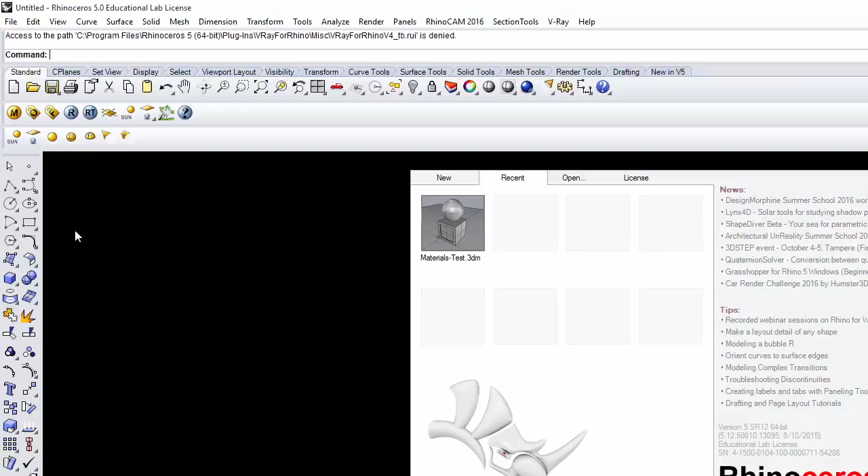This is a requirement for your assignment 203. So not only do you need to have 3 renderings with beautiful skies behind your buildings, you also need to show me a laser cut file of what you would use to cut out this building if you were going to glue it together, because I think it's important enough to include it. So today is very much about learning the technique. You should have enough time today to also work on your buildings for assignment 203, and or work on your unrollable surfaces for assignment 203.

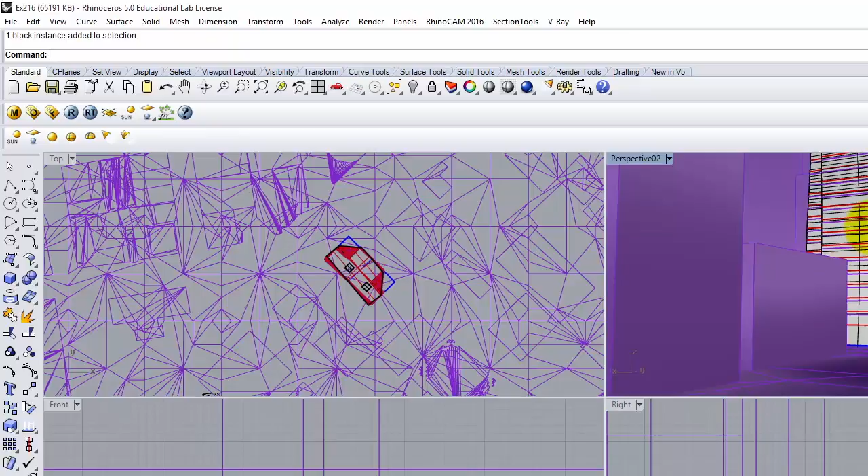So let's go ahead and open up my file from last class. What were we in? What are we in? 217 today, so it would have been in 216. You know what? Let me go back another one here.

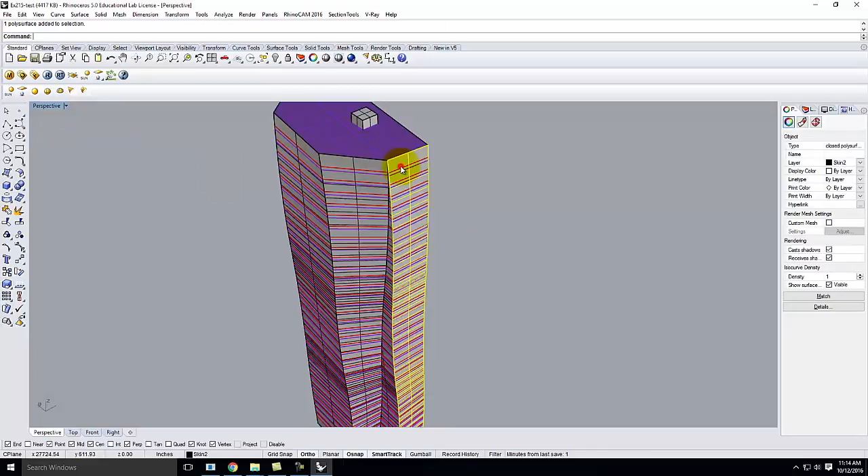Okay, so I have just the building here. Let me go ahead and go in shaded mode. There it is. Okay, and what we're going to be working on today is just the outer skin of the building. So I'm going to go ahead and in the layers, I'm going to turn off. Let's get rid of the floors. Let's get rid of the ceilings. And we'll leave just the skin there.

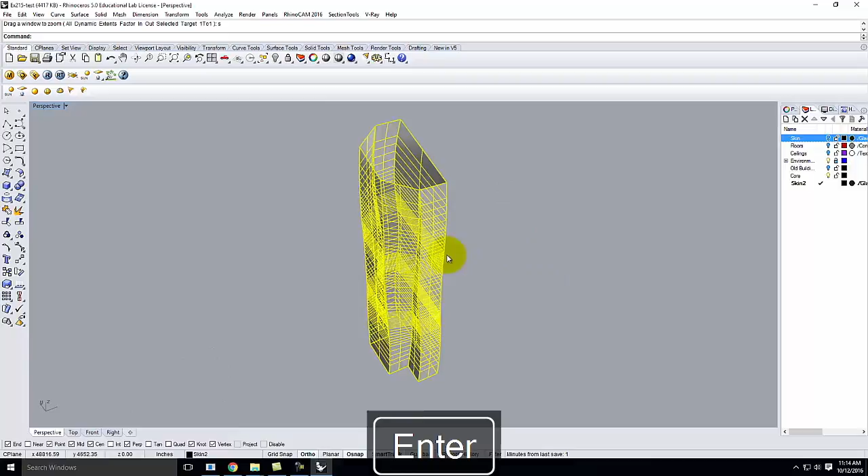I'm going to go ahead and just copy this skin for a second over, so that I'm working with this elsewhere. So I'm going to go ahead and copy, move it over, take this and zoom selected on it. So we're looking at just the skin of the building. And so the idea here is that I want to be able to take this and make these surfaces flat so that I can cut them out, glue them back together, and they'll end up making this building.

And so Rhino has a great command for it that's called unroll surface. I could take any one individual surface and go up—I forget what this is under because I always just type unroll surface. So bear with me. There it is. It's under Surface, Unroll Developable Surface.

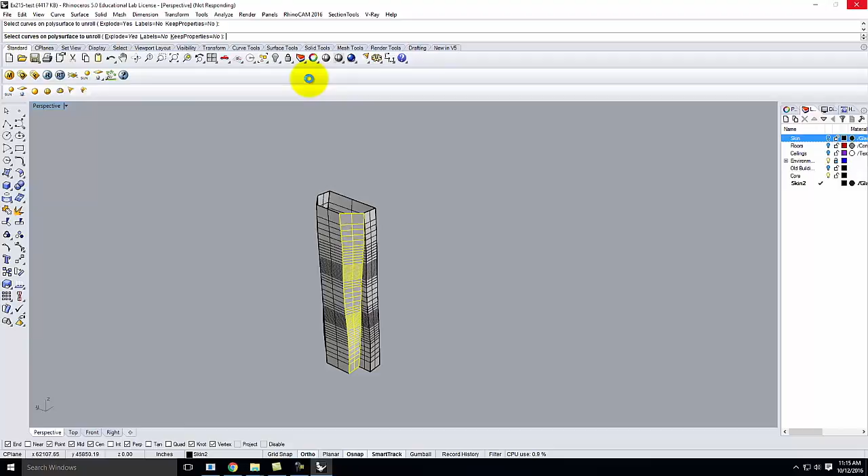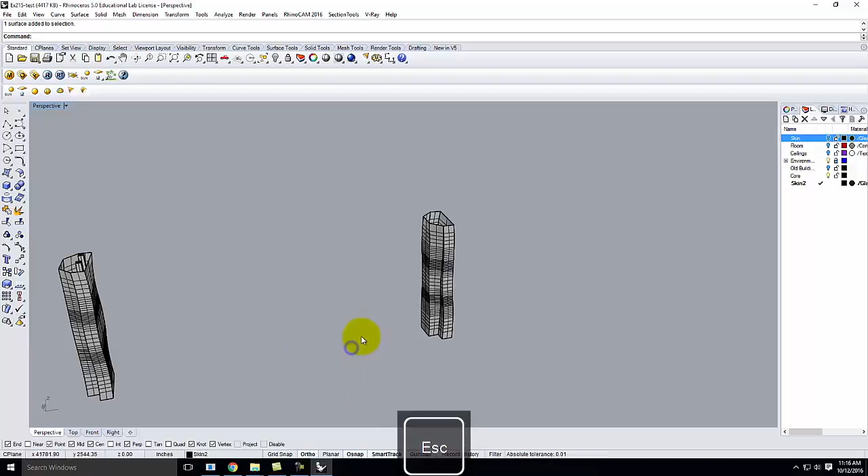And when I do that, I get some options. It says select curves on polysurface to unroll, explode yes, labels no, keep properties no. I'm going to talk about what these are in just a second. But essentially what this does when I say enter is it will create a flat surface for me that's over at 0,0 that represents this piece that I had selected before, okay?

But it can be very, very challenging to unroll these surfaces and figure out how they all glue back together if we don't do them all at once. And so instead of just selecting an individual surface, I'm going to take this a step further.

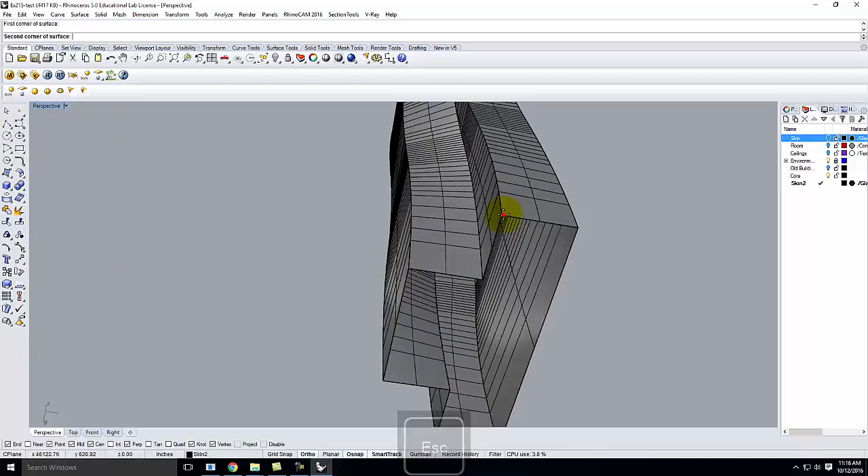Let me go ahead and create a top and a bottom for this building because somehow I've managed to lose the top and the bottom. Okay, so I have a top there. Create a bottom here real quick.

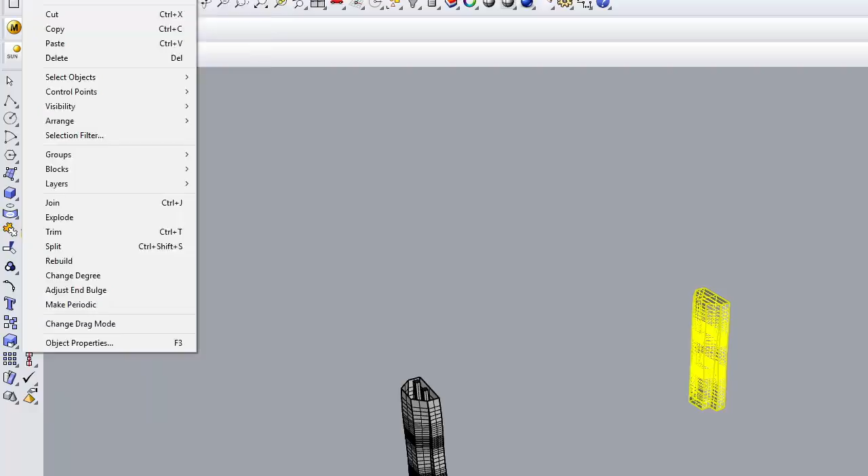Okay, now that I have a top and a bottom, I'll go ahead and take the whole object, and then I'm going to join that object together. So I'll go up to—it's under Edit, Join—and that now becomes one. It's supposed to become one polysurface. Why didn't I? Oh, how nice, right? You gotta love it when things don't do what they're supposed to do.

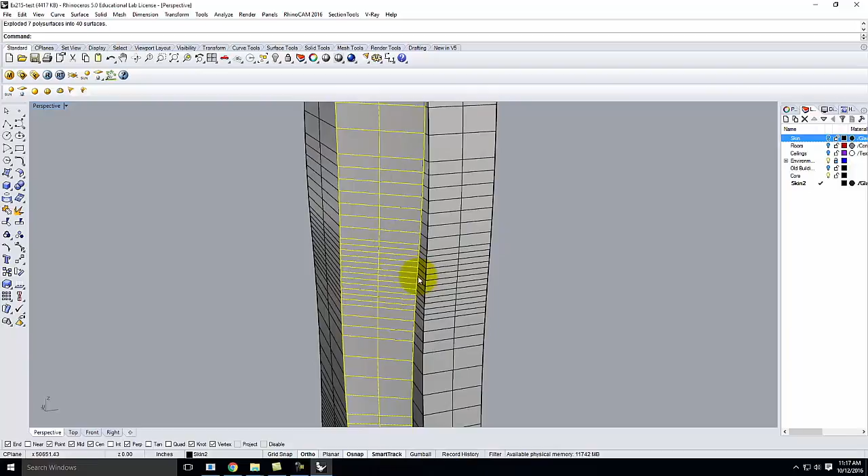Somehow I really managed to mess this up. Sorry about that. I have a bunch of surfaces on top of themselves. Let's see if we can fix this.

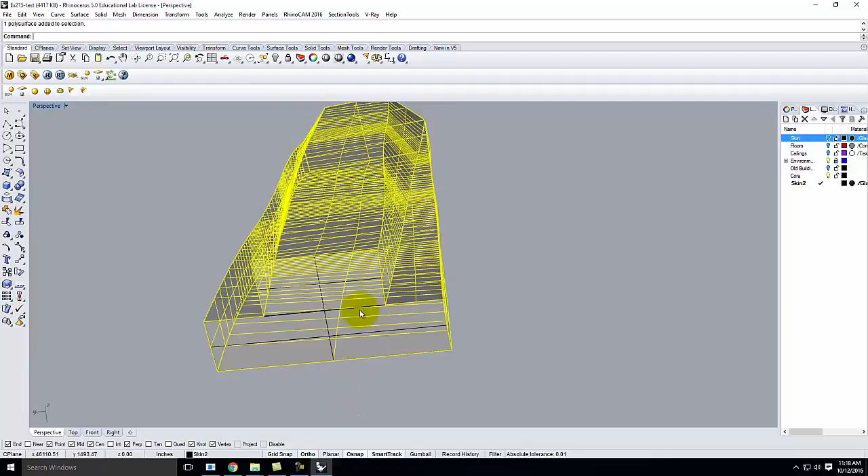All right, see if we can join that. And let's move this one. And it's still being terrible.

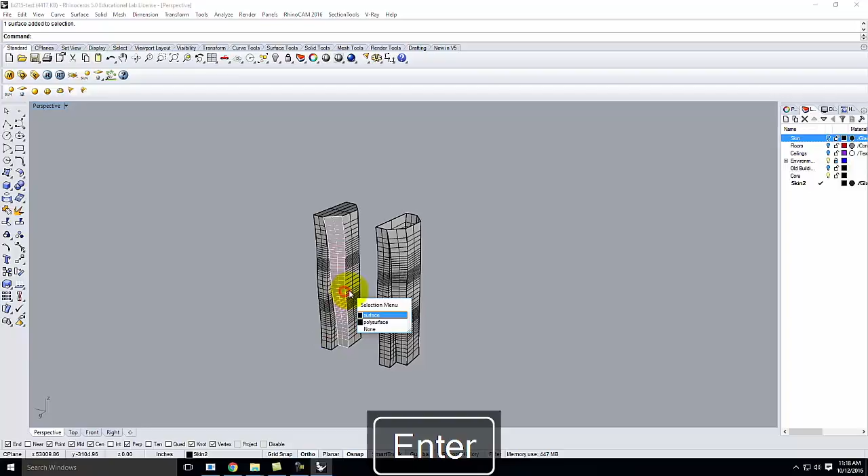Huh, okay. You know what? Give me a second. I'm just going to make a new building because this is really not working for me right now. So let me go ahead and create a new building really quickly so you can start to see this. So at 100 feet, 200 feet.

Actually, you know what? Since I had that building, let me just create a few curves from it. I'm going to duplicate edges 1, 2, 3, 4, because this may happen to you. You may end up like me and have something that gets messed up.

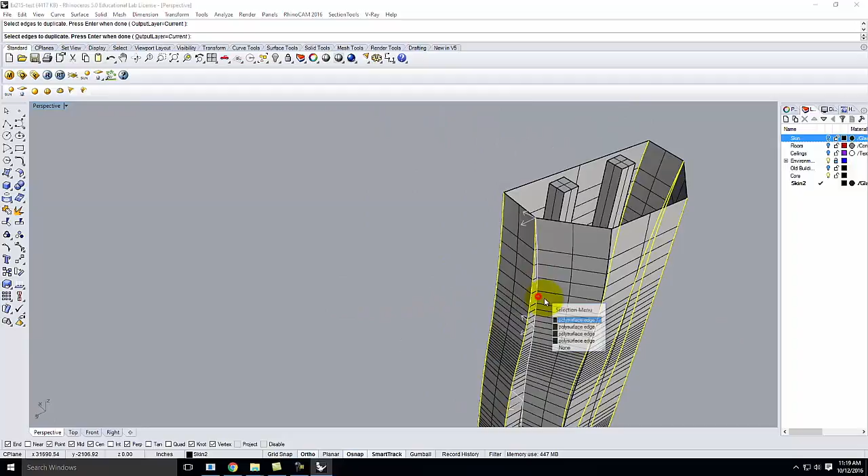6, 7. So all I did was I duplicated my edges around my object. Let's move these over so that they're by themselves. And then I'm going to select the opposite pieces like this, and we'll loft and build each of the pieces as they go together. So let's take this and this, loft.

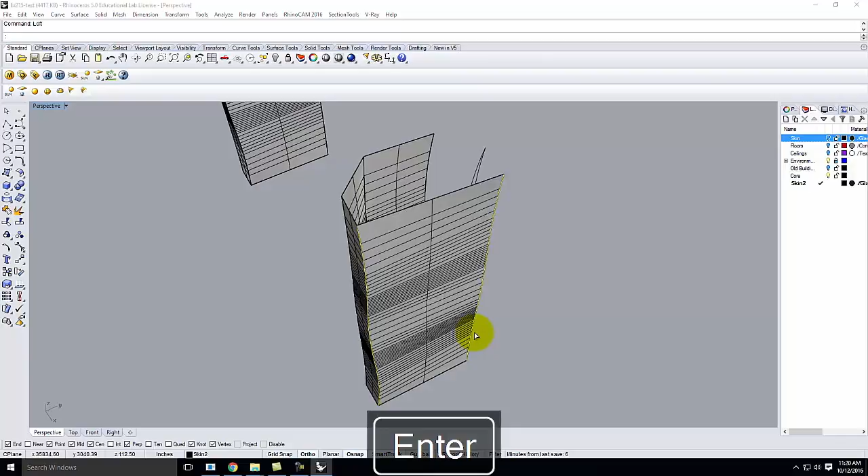It's always a safe bet, especially even if you have double curvature and it won't let you unroll the surface. If you duplicate the edges, the major corners, and then loft between them, you know that that's a flat, developable surface between them. Therefore, you're in all likelihood going to be able to do the export or to do the unroll.

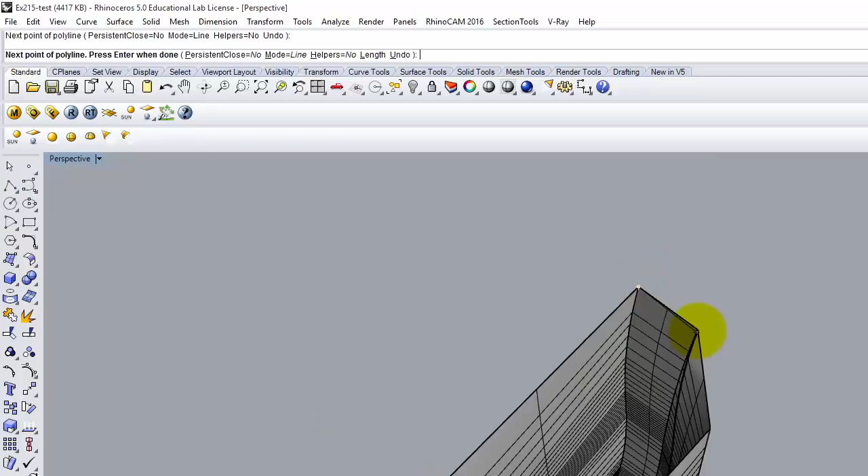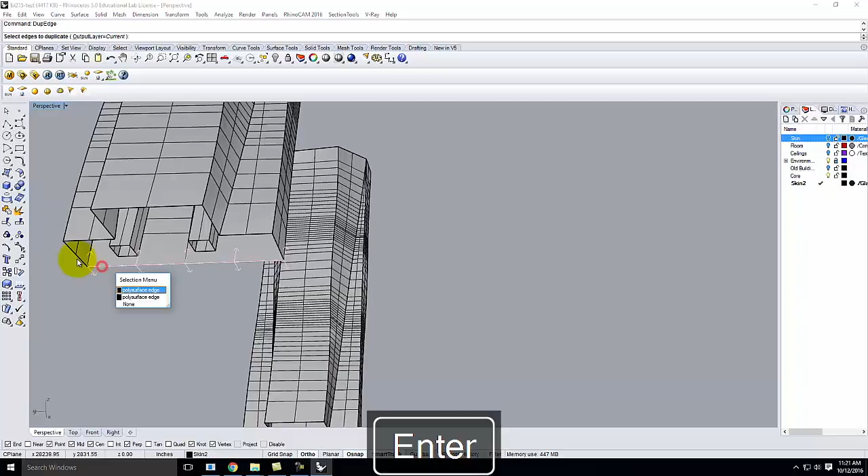Go ahead and take this, and let's patch that. There we go. And let me also patch the bottom here. It's essentially, I could do a surface from 3 or 4 corner points and join them together. I can do the edges like this and then patch. It's just really what feels right for you.

Did I do the wrong one? Yeah, I did. It's this one.

Okay, so now I have that shape the way it should have been, and I should be able to take the shape and I should be able to join them together into one polysurface. That's what we were after.

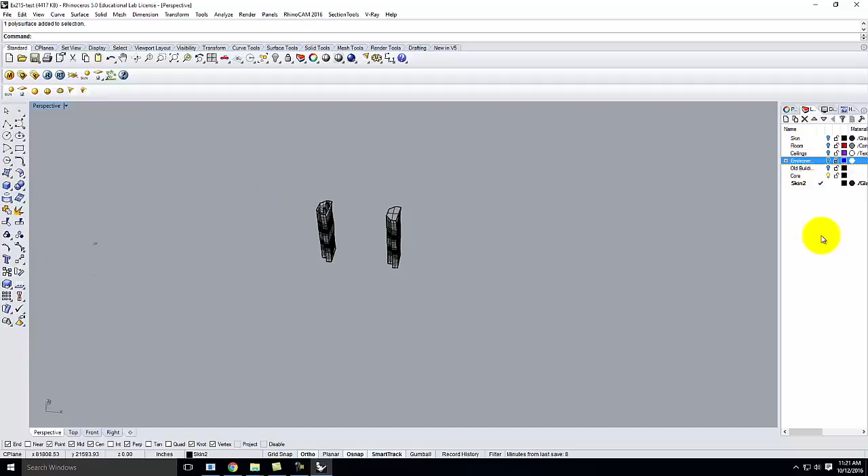Okay, now that it's joined together in one polysurface, I'm going to go ahead and make my life a little bit easier. I'll turn off my environment so the infinite plane goes away, and I'm going to create a new layer here, and I'm going to call this Unroll, and I'm going to put it at the bottom of my layer stack right there, and I'm going to make it active.

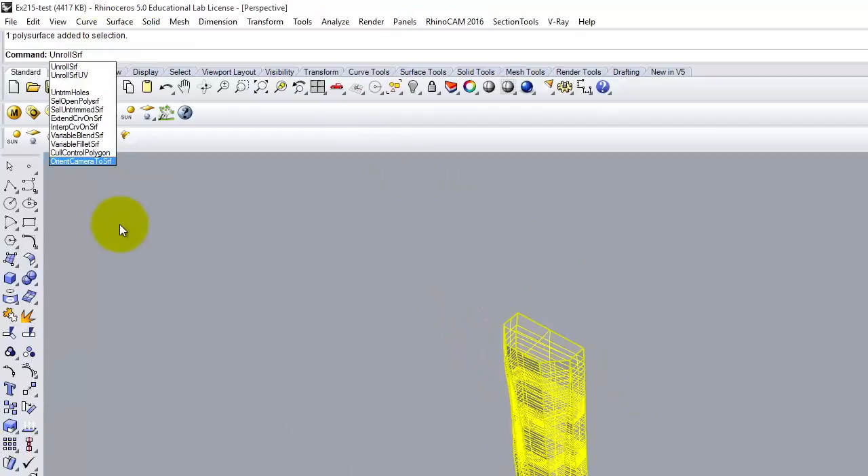And now with that layer active, I'll select my object, and I'm going to type unroll surface, unroll SRF, or I can go up to the surface menu and select unroll developable surface. And when I do that, it of course is going to tell me that I can't do it because it's not a developable surface, even though I just did this.

It probably means that one of my patches at the end is incorrect. So let's go back and fix those. They're curving. We'll go ahead and just do 2 rectangles.

Going to join that together, trim, and get rid of that. And trim that little piece there. That might have been my problem piece right there.

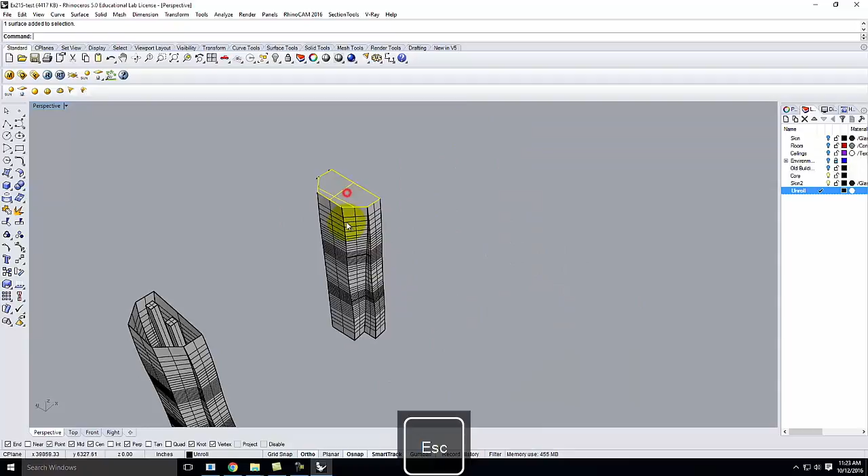All right, let's try that again. So this, plus this, plus this, and this, join, one polysurface, unroll surface. There we go.

So it's going to ask me to select the curves on the polysurface to unroll. Right now, I'm not going to do anything about that. Explode, I'm going to set to yes. Labels, I'm going to set to yes. So I click on labels, and keep properties, no.

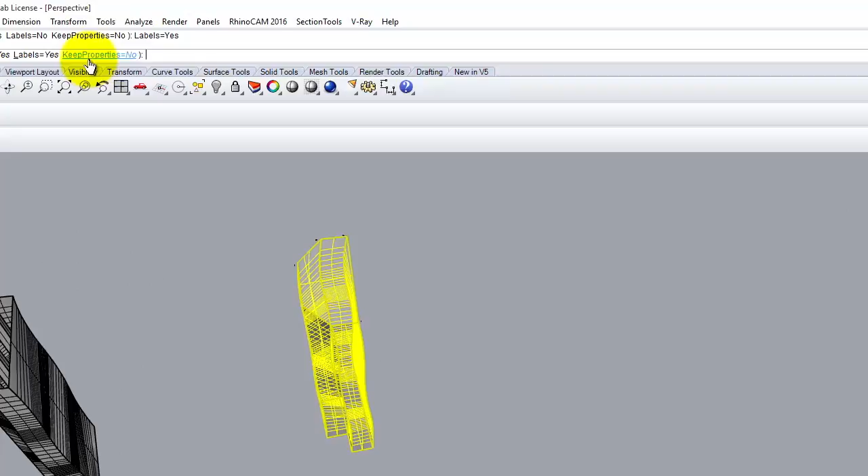Okay, now when I do this and I press enter, you'll see that I get a couple things. One, on my original building, I get a bunch of labels that go around each surface. And on the unrolled surfaces here, I get a bunch of labels there as well. Okay, this is going to help me glue this object back together.

Okay, so let's look at this in the top view for a second so we can see the pieces. And this is a lot like if you guys remember in 130 when you had to draw the shape and then cut it out and glue it back together. This is essentially what Rhino's doing.

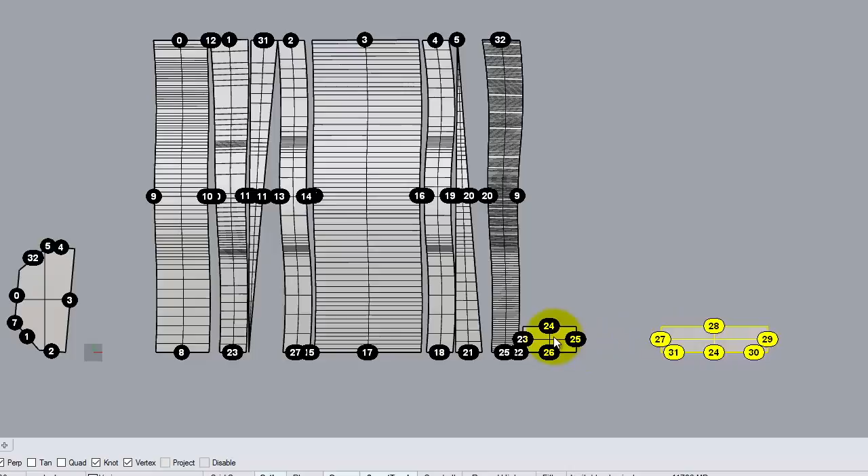Okay, so obviously this piece is the top, and these 2 pieces are the bottom, there and there. So what I want to start to do is I want to start to match up where these pieces fall next to each other. So you see here at the bottom, I have a piece 24, and I have another label for 24. So let's move this piece over to here so that 24 and 24 line up together.

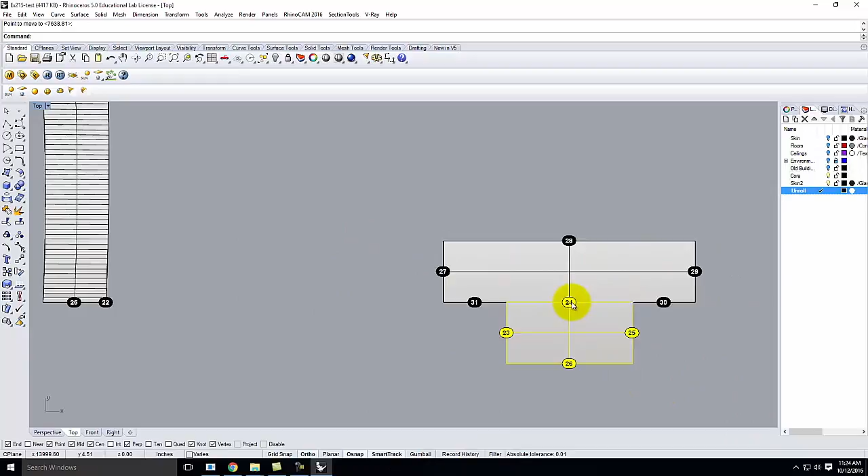Okay, then I probably have something labeled 28. Let's see here. I'm not seeing it. Let's see if I have 26.

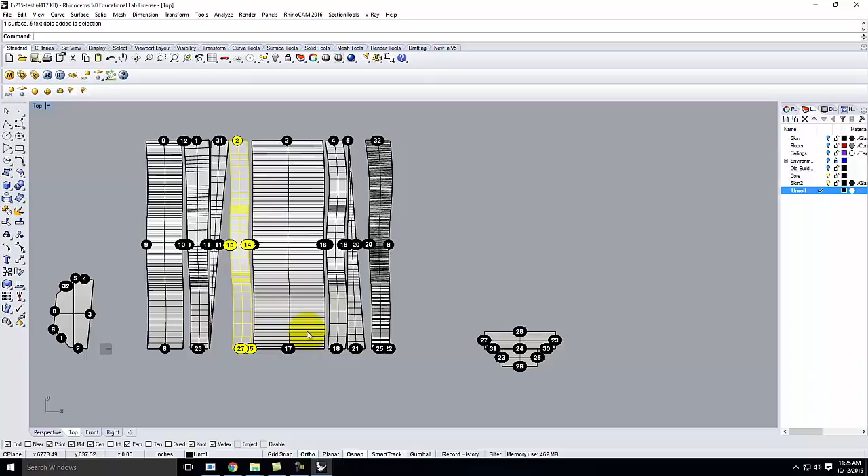You have to love it when your numbers don't line up. All right, well, here's 1. We'll start with 1, move 1 over here to 1, and I'm going to rotate along 1.

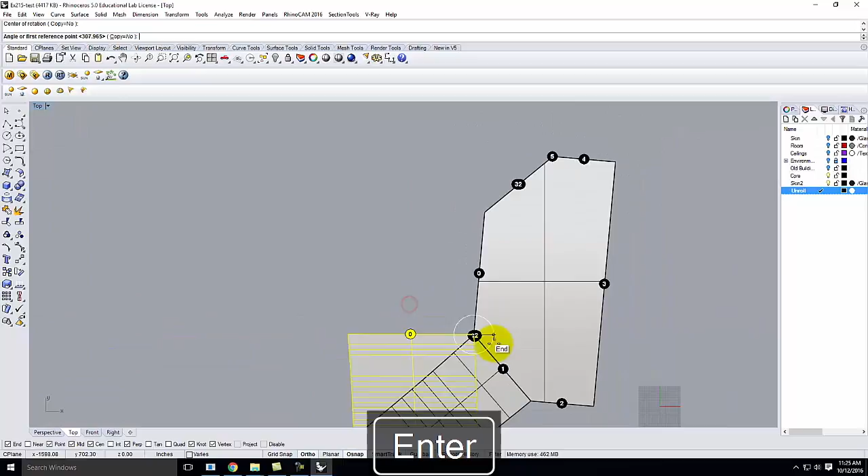So that lines up there. All right, then we'll take 0, move 0 to line up right there, and we'll rotate to right there.

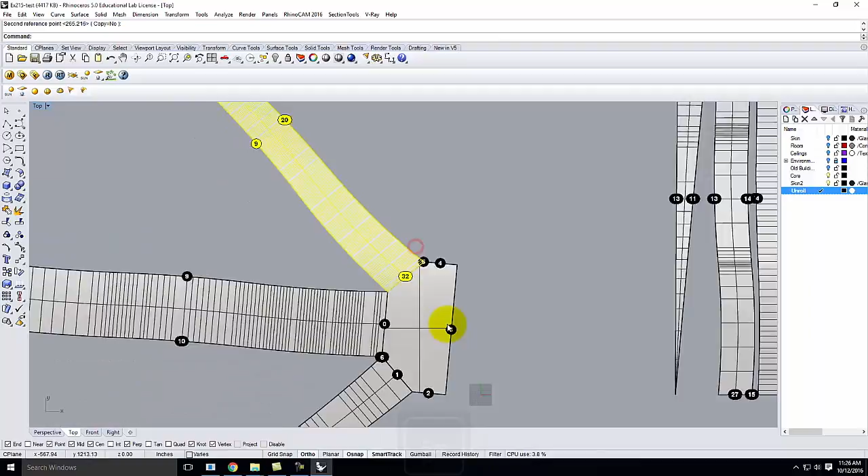We have a 32. Let's move the 32 to right here, and let's rotate to right there. Okay, do you see how these pieces are starting to come together?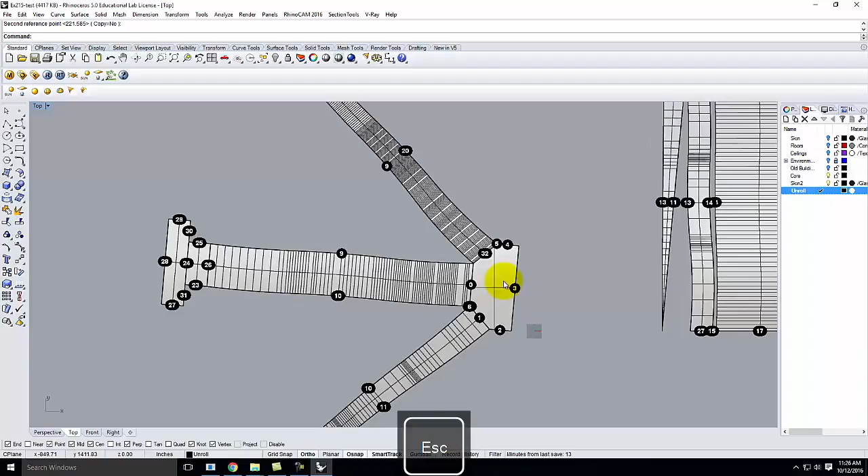Right? I also know, and why the numbers don't match up for me, I'm not quite sure, but I know that this end here is going to match up right there. So those 2 are there. And now it's a matter of how do I put these other pieces in.

So number 31, let's see what the best logic is here. So number 3 and number 3 can go together, like that.

And let's see if we can find a 2. There's a 2. Let's move 2 to right there. And let's move 4 to right there.

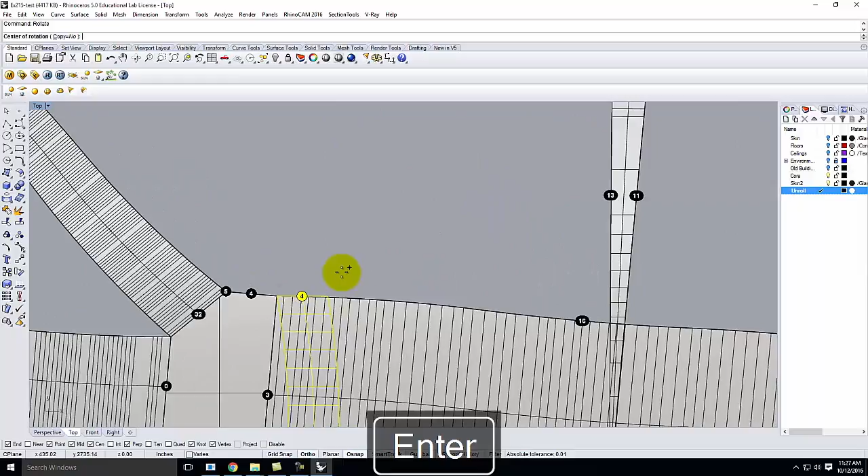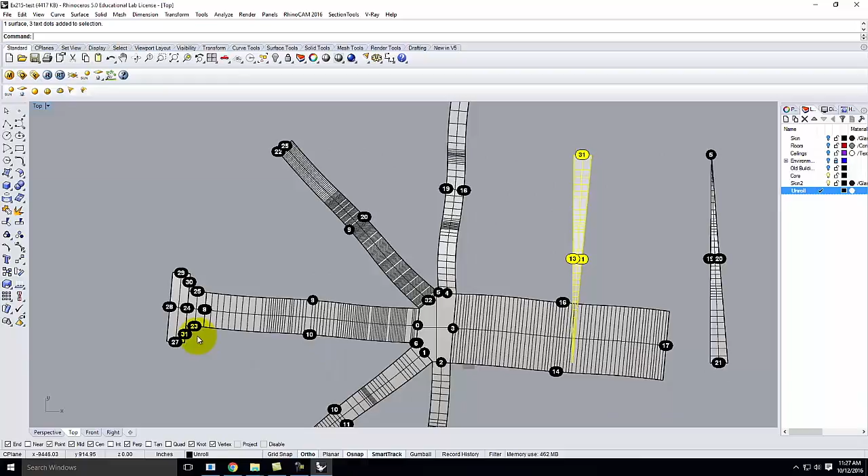All right, so then we have these last 2 pieces. And these 2, we've got 31, and why they don't match up, I don't know. But 31 here is going to go right there, so we can move 31 right here.

Right there. We want to make sure that they don't overlap, which they don't. That means we can cut it out.

And then we'll take this piece and we'll move it. And why my numbers don't match, I'm not quite sure. They should match, but for some reason they're not. We'll put that right there as well.

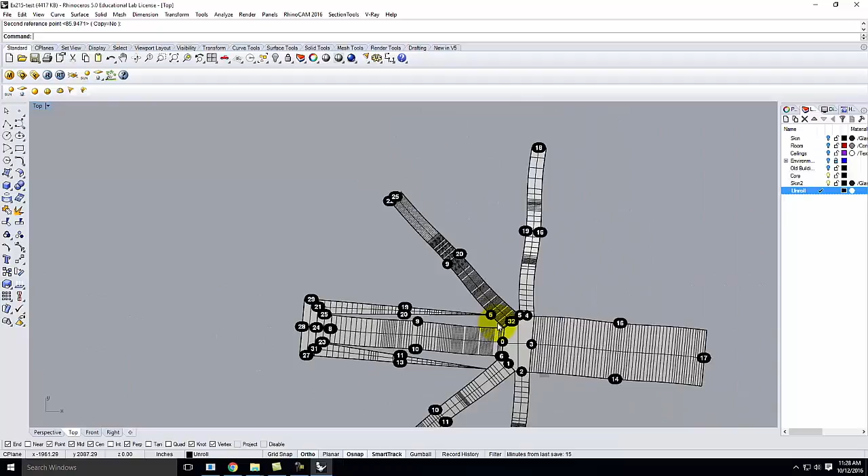And so in this case, those 2 overlap. That's going to be a problem. We have to kind of sort out how we could change this organization.

Probably the easiest thing to do would be to take this and move it to this end right there. And again, I have to rotate it to make it match, there to there, because we don't want to have pieces that overlap each other.

Okay? So what I've done is I've reassembled this building such that if I were to fold it together and glue it, it would make my shape, essentially. But I need to take it a step further.

I need to act as if this is something I'm going to laser cut, so I need to do some cutting and engraving layers. So let me go create a new layer, and I'm going to call this layer laser cut, with a sublayer for cut and a sublayer for engrave.

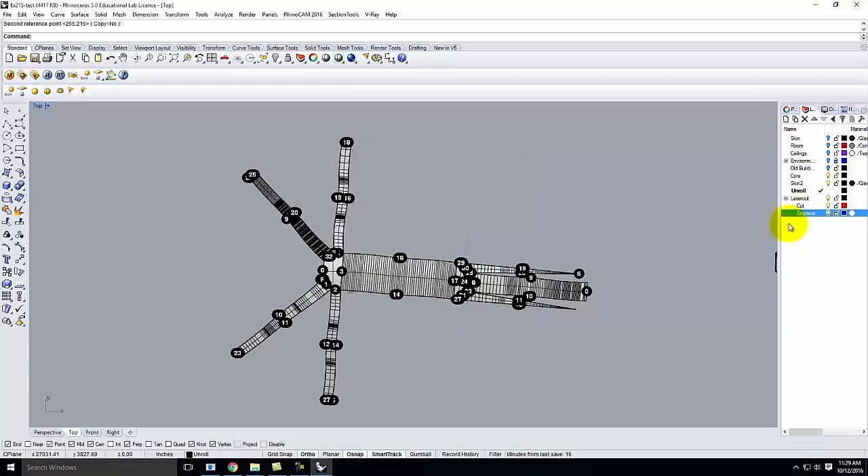And you guys remember from the topography that the cut layer needs to be red and the engrave layer needs to be blue. Okay? I'm going to start with the engrave layer active, and go through and duplicate these edges.

Let me go ahead and duplicate edge, and I'm going to go around and say that edge, this edge, that.

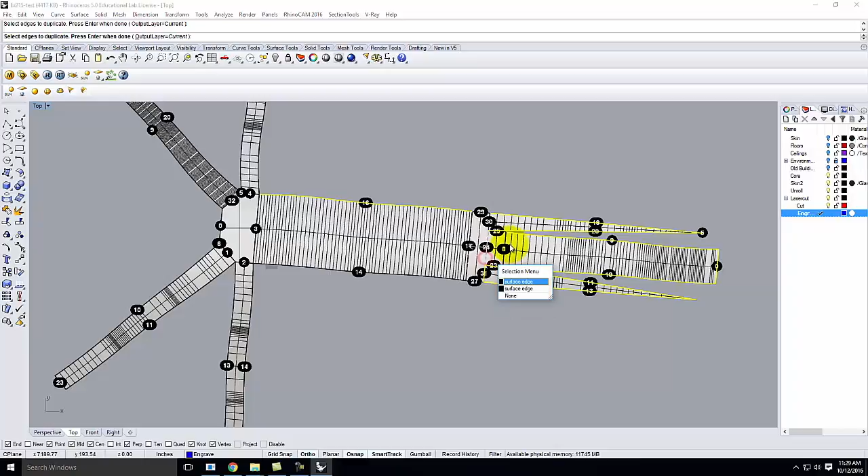The other option would be duplicate border, in which case you'd get every border. Sometimes going through and mentally working through the numbers will help you figure out which pieces are which, and you don't end up with double lines.

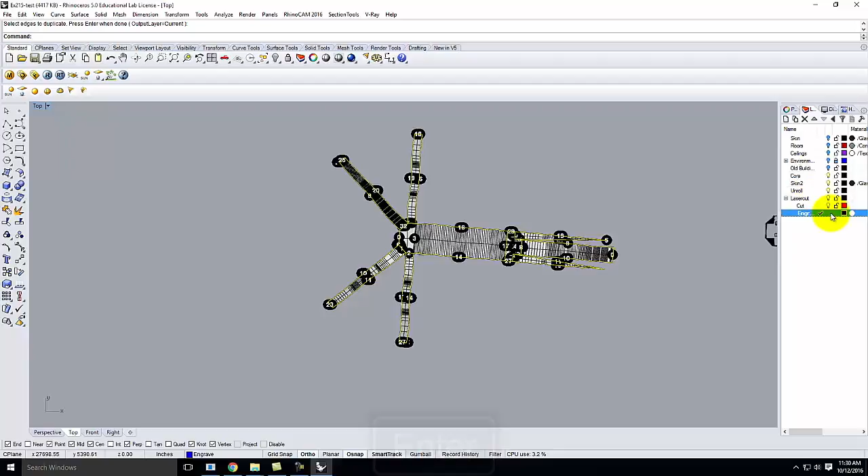All right, let's see here. Let's take this, that, and that, and that. Okay, so I have all of them, and when I hit enter, I'll get a bunch of blue lines that then outline my drawing. If I were to turn off the unrolled surfaces, there's all of my blue lines.

Okay? Now I did these in blue because in some places I'm going to cut them out, but in some places I want to have a little tab that I can glue together. So I'm going to do a few offsets in certain places.

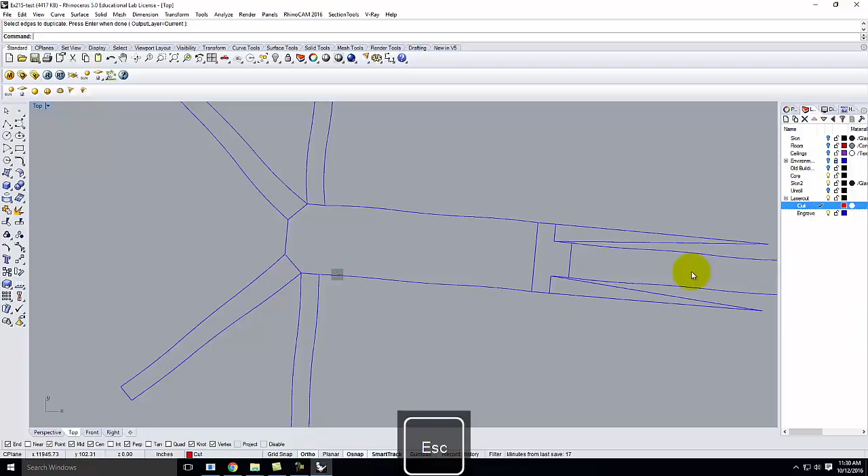So let me go ahead and do offset. Well, before I do that, I'll make cut active. I'm going to offset, and my distance, I'll type D for distance. I don't know what the exact distance is going to be, but I want it to be maybe about that much.

Okay? So then we'll go ahead and start offsetting. So my first one there, I'll offset, and that's one tab. But I need to know where the tabs are on the opposite side so that I don't create another tab.

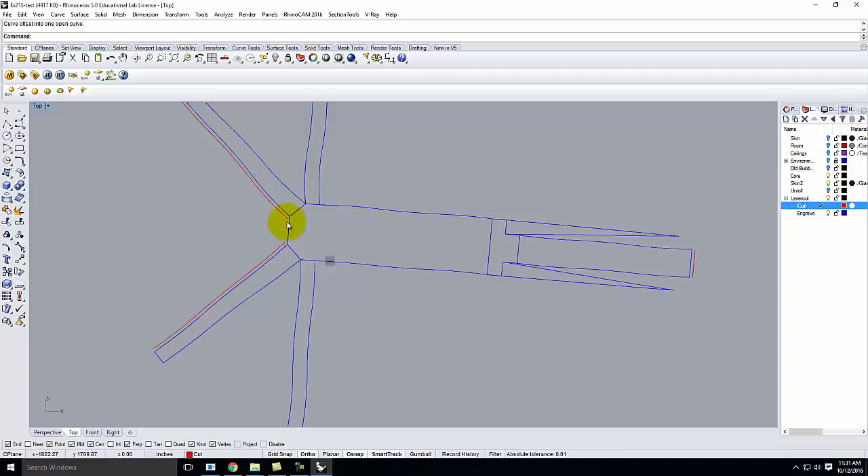So if I have tabs there and there, for example, those are going to glue to this piece here, so I don't put tabs on this, right? But I might put a tab here, and that's going to glue where the tab is here. See how I kind of am nesting them a little bit?

So let's say that I go ahead and I do tabs on the opposite sides here and here. It means I'm not going to have a tab on these little pieces, there and there, or there and there. Okay? So let's go ahead and tab this.

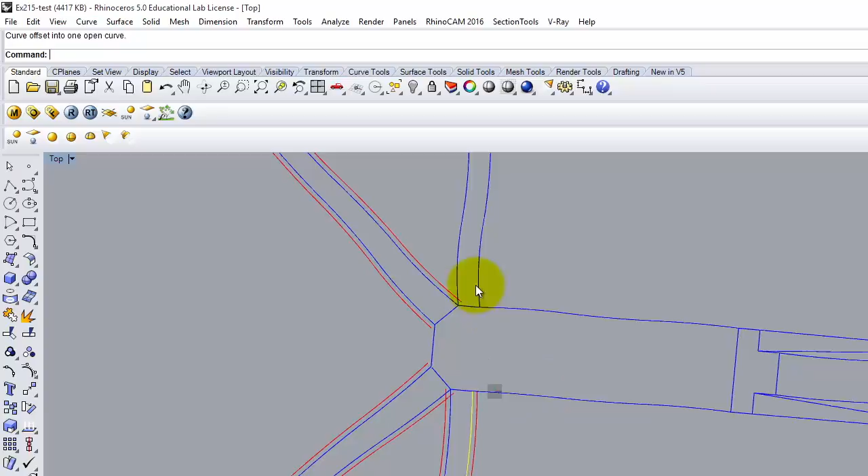And we'll tab that, which means we won't have a tab here. We'll go ahead and tab this one. Oops, that wasn't what I wanted. And this one. And then we'll go ahead and create some tabs at the bottoms of these.

And that will help us glue these pieces to this base once it folds. Okay, and I don't think we need any others. Those are glued, those are glued. All right, I'm just checking.

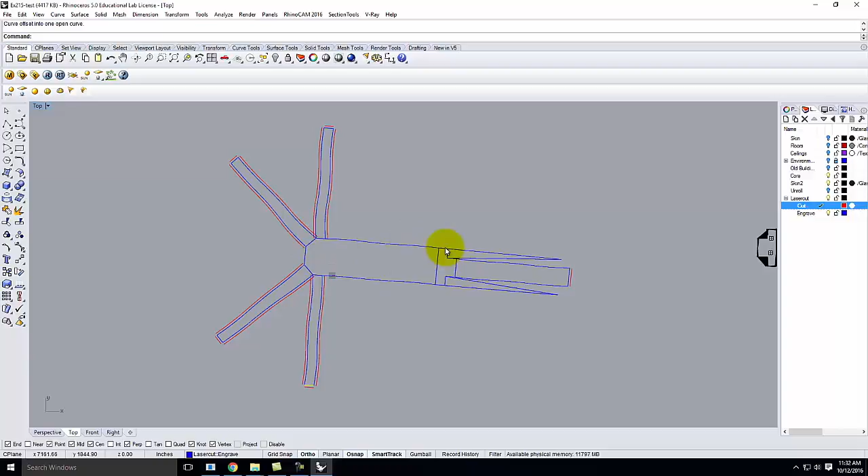Okay, so now I have to do a little bit more cleanup. So on the ends here, we'll put those together. Sometimes when you're doing this, it's easier to just make some in-field modifications after the laser cutting is done. But if you can do this ahead of time, it'll save you a little bit of time.

So that's now ready. Those don't need to overlap. We'll look at where they intersect. Let me turn on intersection here, and we'll go to right there. And then we'll trim this and this so that that's clean.

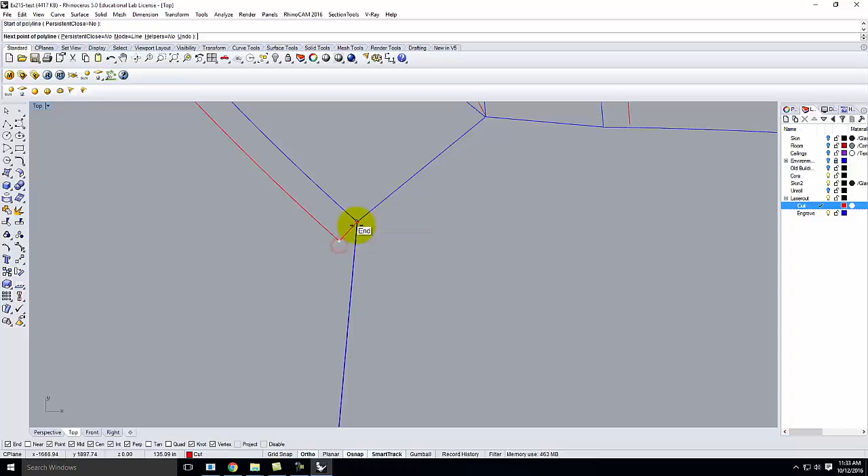We'll draw this back here. Now, right there, there is no tab, so this isn't an engrave anymore. This should really be a cut. So let's change the object layer. And that then is a cut.

We'll draw from there to there. Same thing from the intersection here. And we'll trim this there and there.

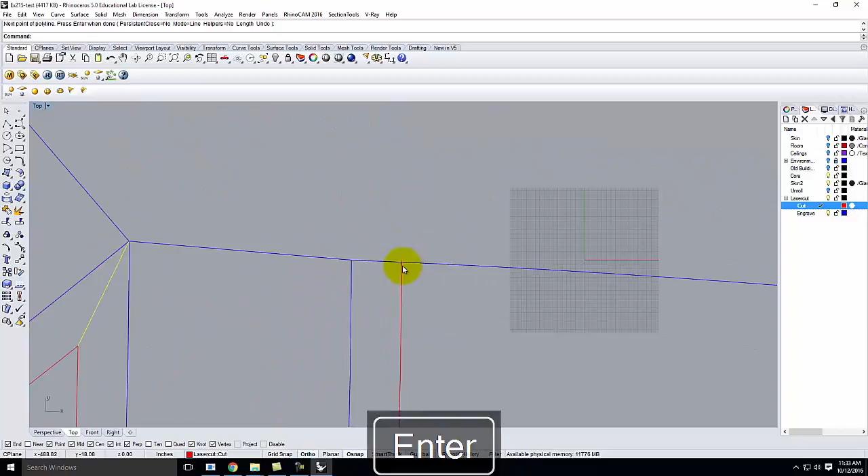That one's just a little bit long. I'm going to go ahead and make this an engrave, or a cut line. And then I'll also just trim off that little piece there. All right, so we're pretty much all the way around.

We're here. This, that, this, and this are all also going to be cut lines. So let's change them.

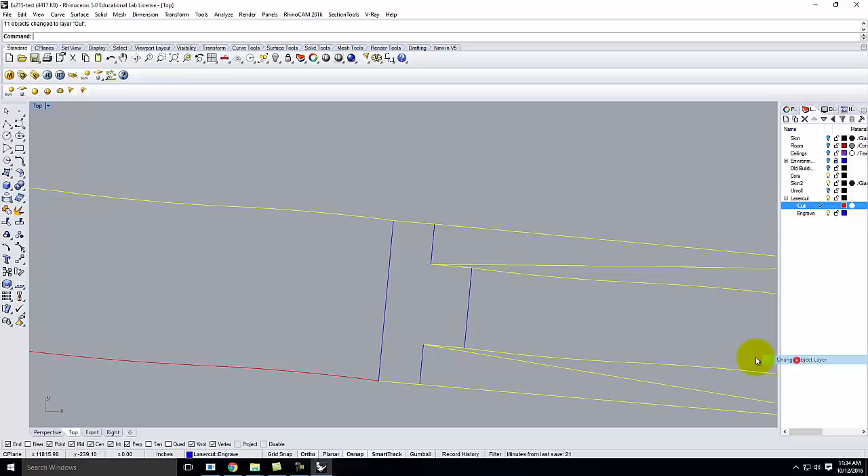That was not what I wanted to do. Okay, so there we are. One more little cleanup here and there. And now I have the shape that's necessary to be able to go walk over to the laser cutter.

Cut it out, glue it together. It would make my shape.

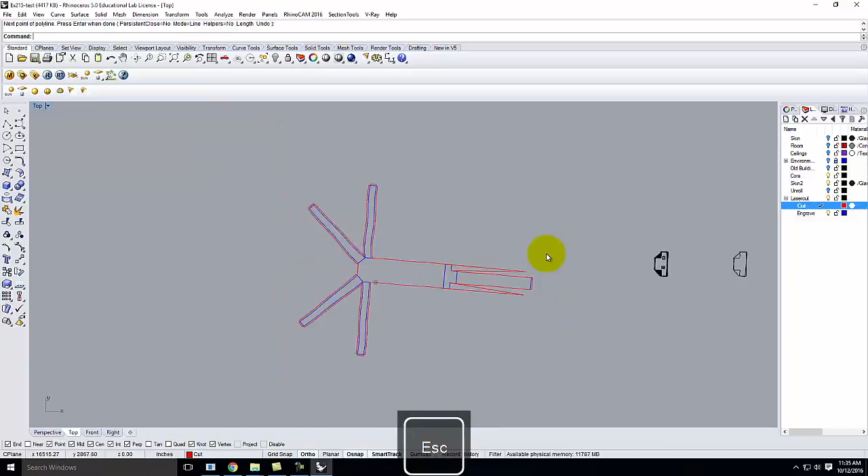But before we get too far into this, I do want to show you another option. I'm going to make a fresh building here and just show you how this works a little bit more simply so you don't have to watch me do it.

But we do have the ability to unroll all of the floors with this. And if we did that, we could have little score marks where every one of the floors would line up, which can be really nice in a model. So I do want to show you how that works. So bear with me for just a second while I create a new little drawing here.

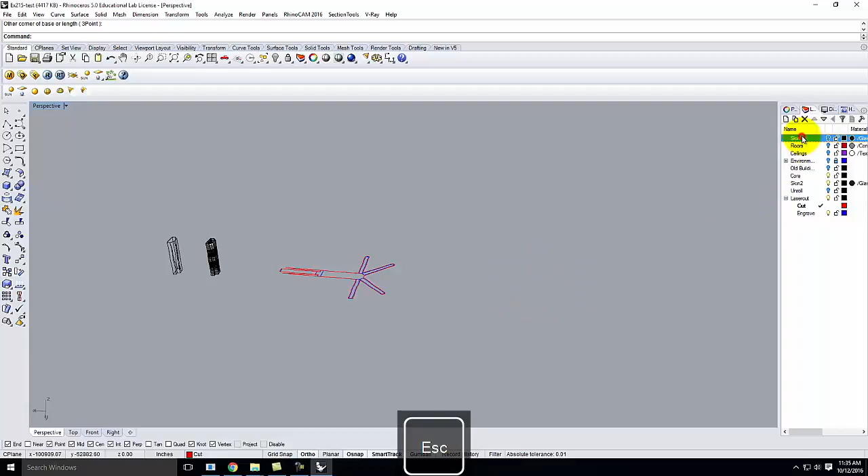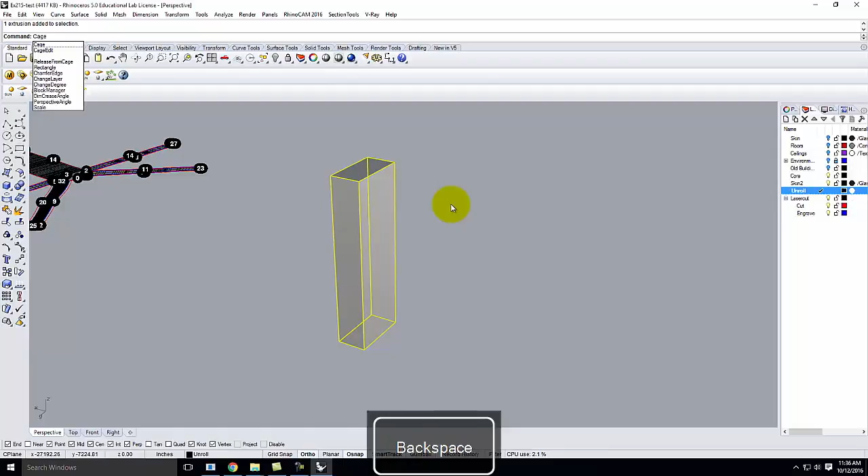Let's see here. I'm going to go ahead and make unroll active again. And let's say at 100 feet, comma 200 feet, with a height of 600 feet. All right, let's take this one. That's cage. Sorry, I can't type. There we go.

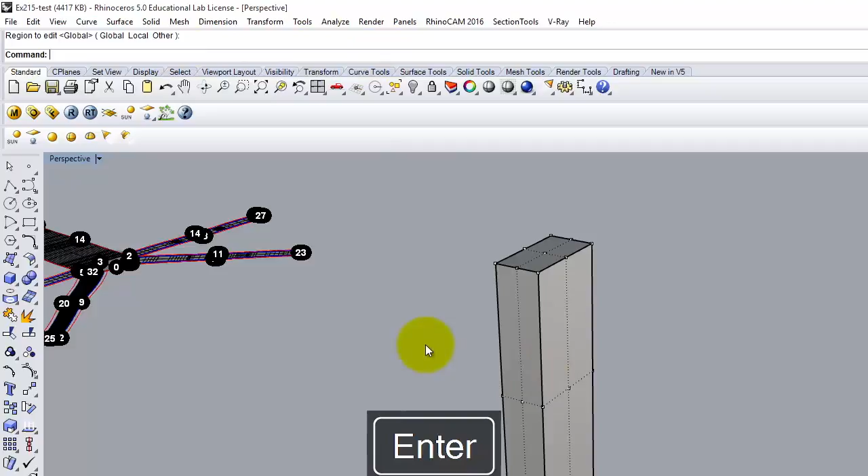Let's do a bounding box, a world, and just 3, 3, 2, 2, and 2. There we go. Let me take the middle section, and I'm just going to move it slightly this way. Okay, again, very simple building, but I want to show you how this works.

Okay, so let me do the floors, larger than the building itself. First one, we're going to move vertically by 20 feet.

And then I'm going to array: x is 1, y is 1, z is 37. And they're going to be 16 feet apart. We'll go ahead and hit enter to finish. So there those are. Okay, those were all the ceilings.

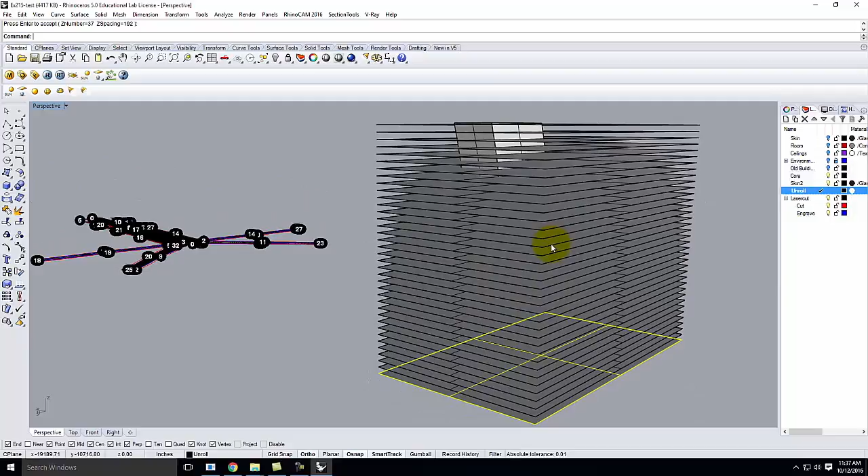We'll go ahead and take this bottom one. We're going to move it, copy vertically by 4 feet. And now we're going to array this.

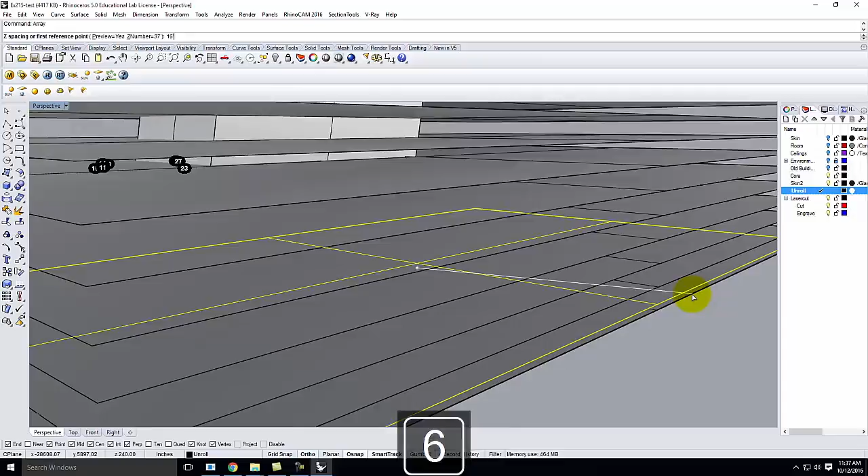So let me go to array: 1, 1, and 37 again. This time it's 16 feet. There we go, we'll finish. All right, so now I have all those floors. And we could trim off the excess. So let's trim.

And there we go, I have my floors. Now, when I do the unroll surface, it can't actually work with the floors themselves. Instead, I want to do an intersect.

And I'll do the intersect on a new layer. So we'll call this floor, I'll call it floor curves for lack of something better. Let's make it active, and I'm going to take all of that and type intersect.

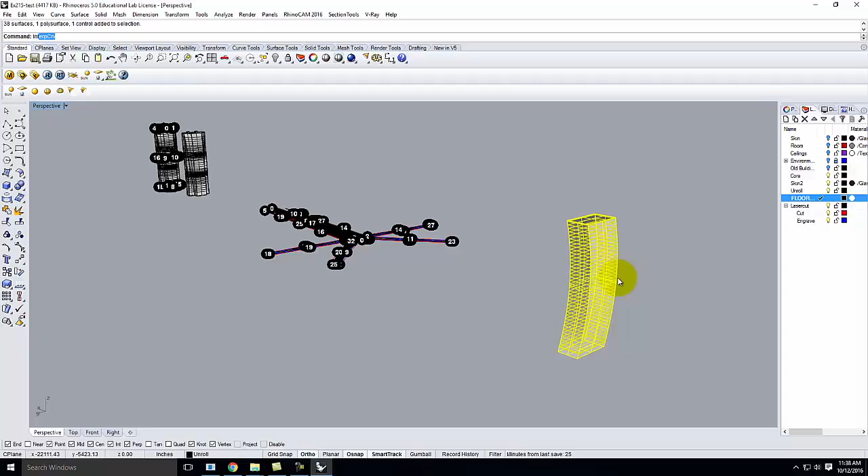And it's going to give me a bunch of curves. There are all the curves.

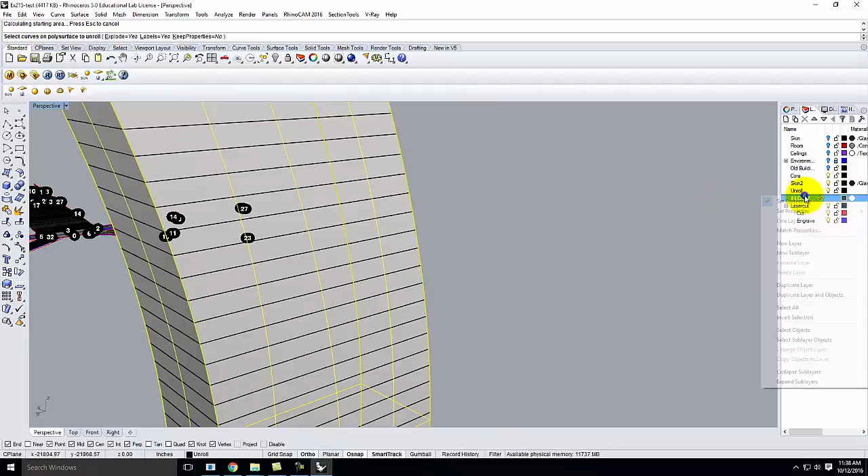Now that I have those curves and they're on that floor layer, when I go to do the unroll surface, we'll do it once again on the surface, unroll surface. Here, when it says select curves on polysurface to unroll, I'll right-click and say select objects on that floor layer, which selects all of the curves. And now when I hit enter...

And let me select these. Hold on, select objects. There we go. So that they're not overlapping each other.

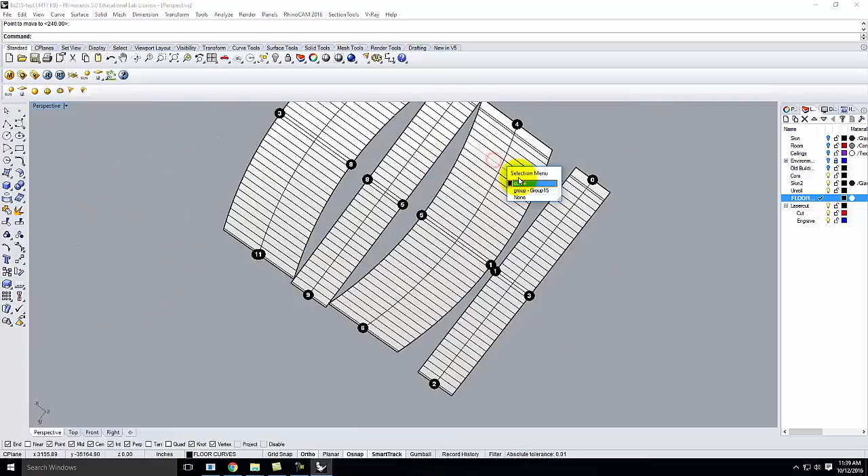It unrolled all of the curves for every floor with my unroll. So now at this point, if I were looking at this object in the top view, there they are. I could actually go as far as deleting the surface itself, and you can see there are all those floors. So let me come back.

Let me duplicate my edges. Actually, let me arrange them first. But I do have to make sure that I select all of the objects when I do this. So let's move this to here.

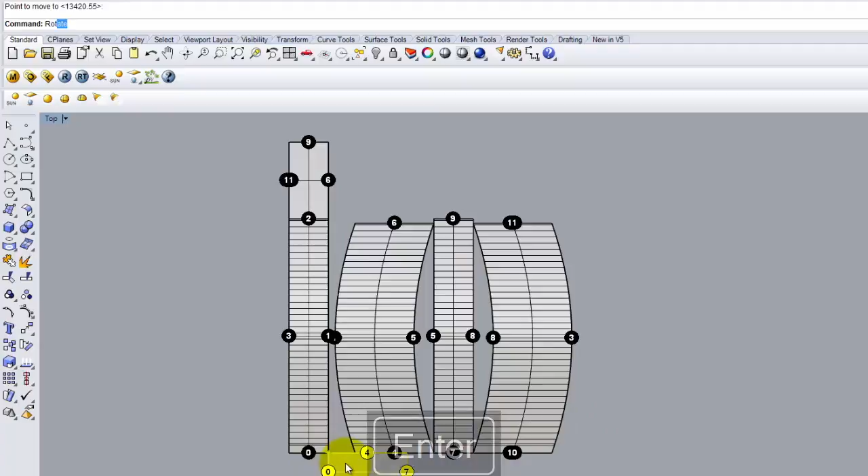Let's move this one there. Rotate there. Move them. Rotate. Again, I'm making sure all those curves stay with my building.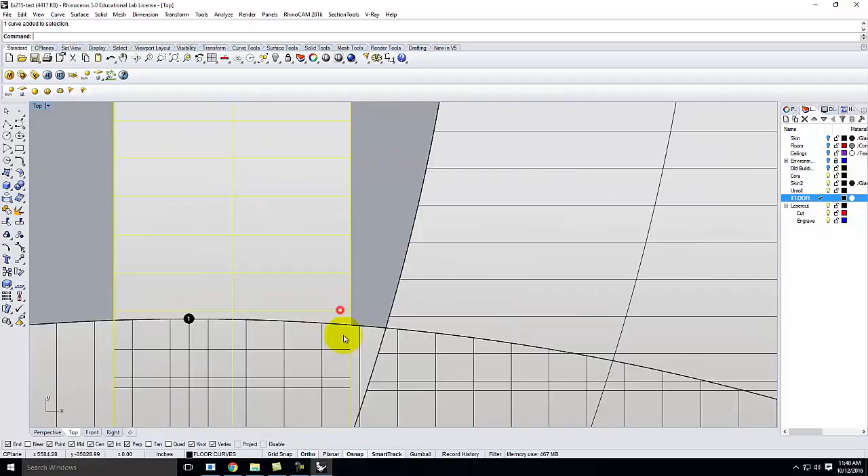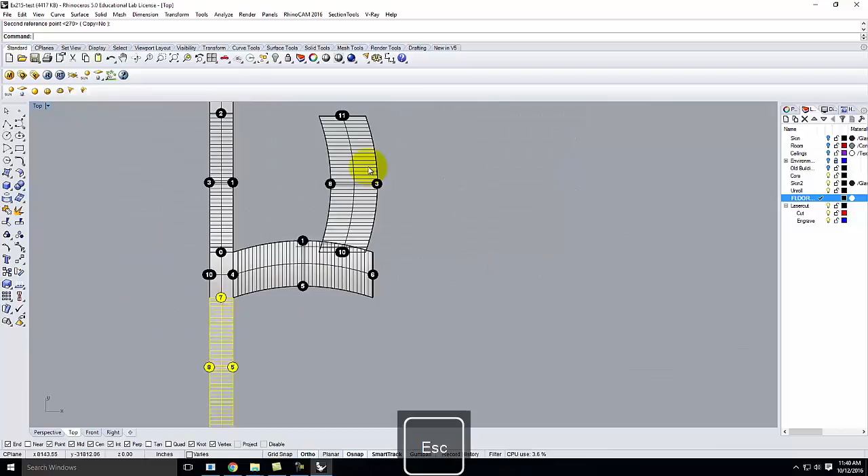All of these overlapped a little bit, so let's make sure I get the curves. Let's move, this is going to go down below here. Right there. Rotate. There.

And let me take this last one, and we'll move this. Okay, so now that one's there as well. Now I'm going to duplicate my edges again, so we'll walk around and say this, this, this.

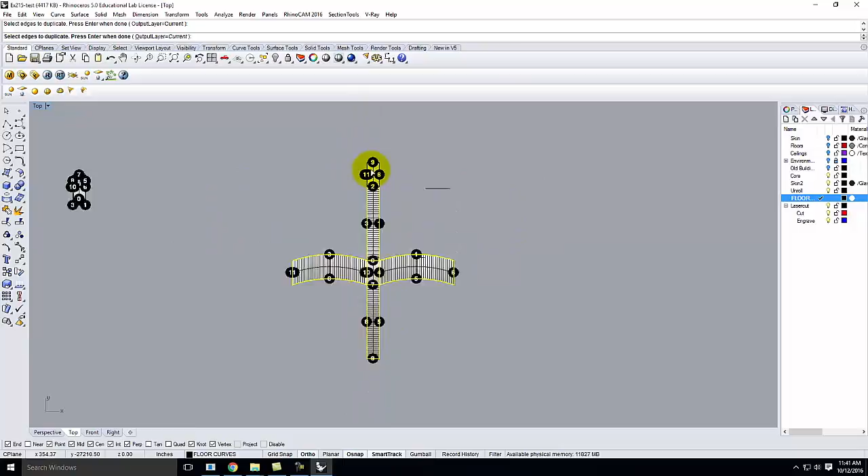Okay, so I have all of those duplicated, and let's put them on the engrave layer. And then I want to select all of those curves.

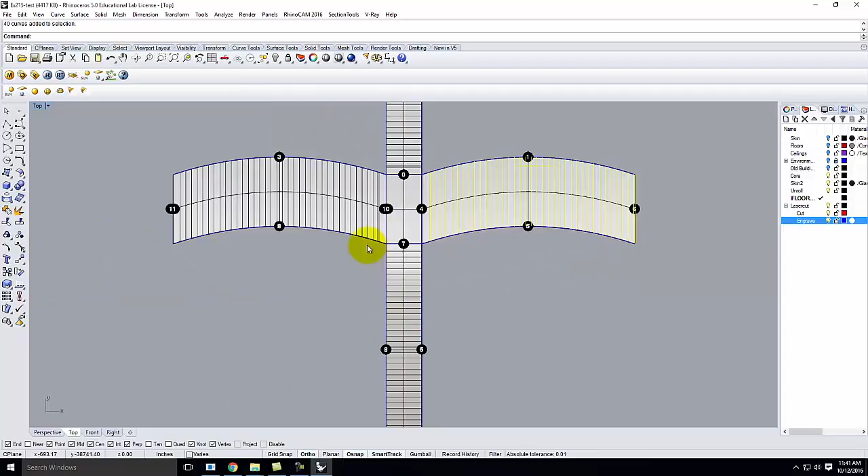So we'll select all of these, select all of these, select all of these, and we'll select all of these. We're going to make sure all of those end up on the engrave layer as well.

So let me change object layer. And then we can go ahead and switch and turn off the floor layers altogether. And now you see that we have, that's an extra, right? All of the floors identified everywhere. And we can go ahead and cut this out.

So again, I have to create the tabs, so I'll do that on the cut layer. So let's offset. And we'll say that one and that one each get a tab.

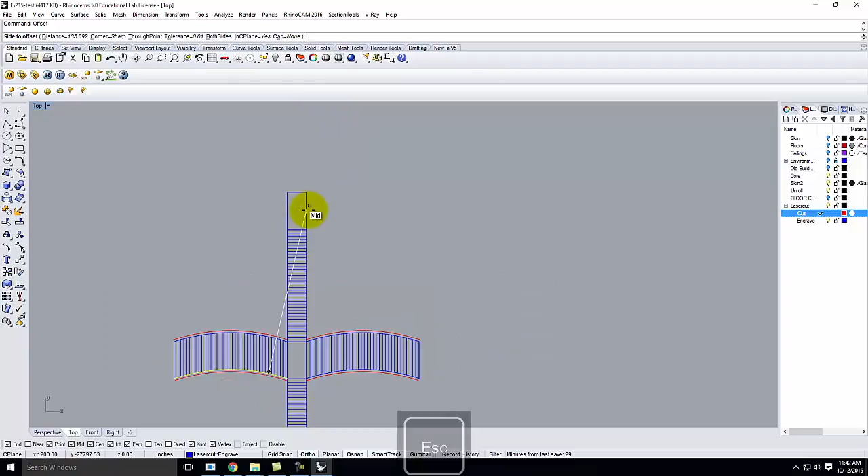This one and this one get a tab. Let's do tabs on either side up here. Okay, so that glues to that. This goes to the top. This goes to the top. One more tab we'll put right there, like that.

And then I have to go around and clean this up. So a few more.

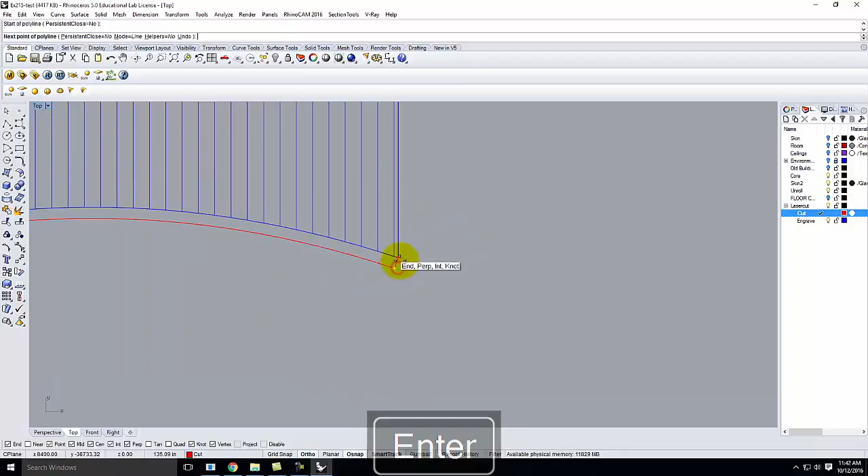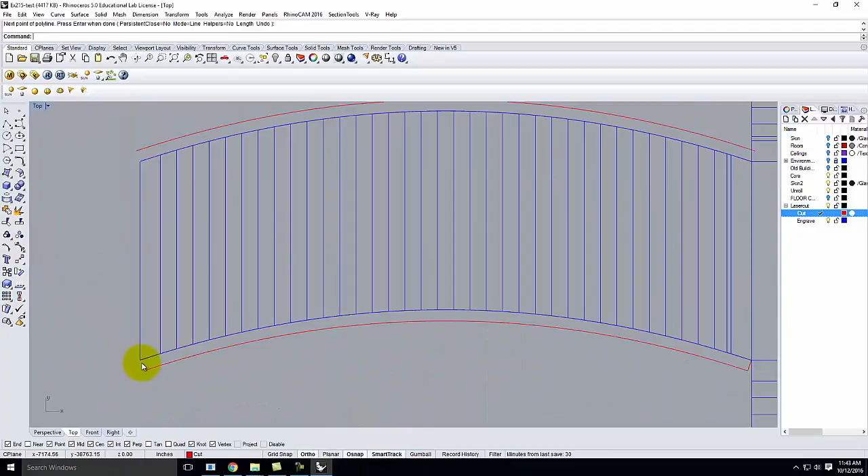Now, in reality, bending these tabs and having them work is going to be a little bit challenging. You'll probably end up scoring them with an X-Acto knife to help them align better. But again, you don't actually have to physically build this. I just like to show you how.

All right, so I'm going to go ahead and trim these off. So we'll go ahead and go to trim. I'll get rid of this and this. But those lines and these lines...

need to be on the cut layer. Good, this and that need to be on the cut layer. And that needs to be on the cut layer.

And then we have to connect these in as well, like that. So now when I go to glue this one together, this one will show engraved lines for where all of the floors are as well.

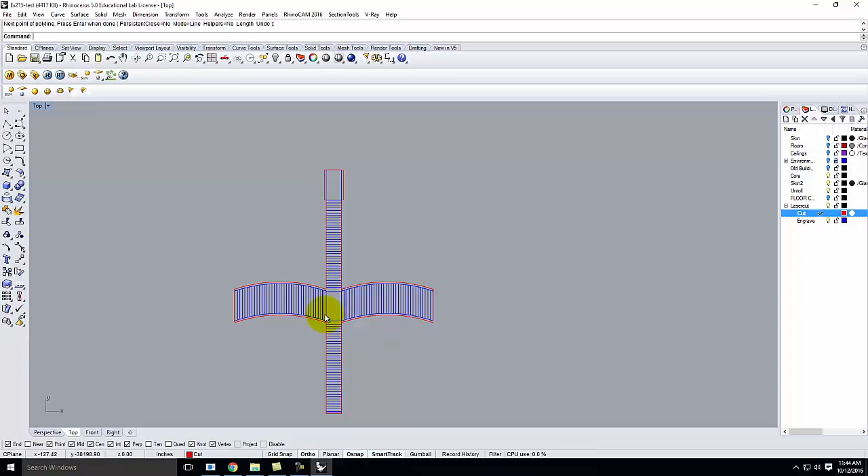Okay, so it's a little bit more precise, not something you have to do as part of assignment 203 or this exercise, but I like to show you that as an option because it makes the final building turn out that much better. Okay, so you're going to work through and create one of these today.

You will also need to do one for your assignment 203. If your building has double curvature or it's not unrolling correctly, go through and extract the corners and re-loft the building together so that they're flat segments, and then you should be able to unroll it. And if you run into trouble, let me know.

Okay, are there any questions about this? No? I'm going to go into my office and I'll grab the sample so that you can see how these kind of glue together and how they work. Okay?